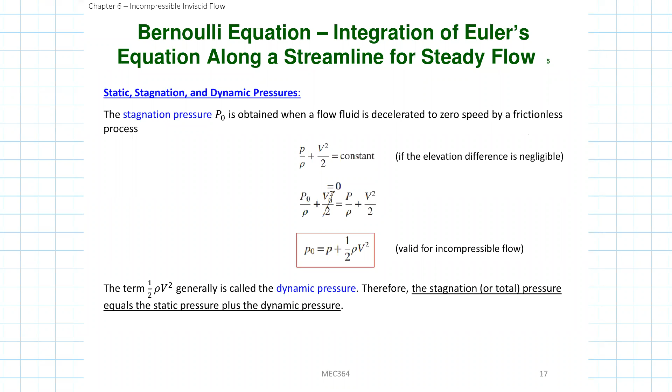In the last lecture, we focused on the introduction and application of the Bernoulli equation. I just want to emphasize once more that anytime you try to use the Bernoulli equation, those four restrictions should automatically come to your mind.

You can only use the Bernoulli equation for steady flow, no friction meaning inviscid flow, and incompressible flow - this is basically the title of this chapter. And the last important one is that you only do this along a streamline. Anytime you use the Bernoulli equation, you must make sure all four conditions are satisfied.

The Bernoulli equation is pretty simple but very powerful to use, and a lot of times you may automatically want to use it because it's very simple mathematically. But if those conditions are not satisfied, the result you get from the Bernoulli equation may be very wrong. This is the thing I want to remind you.

Also keep in mind that the Bernoulli equation is developed from the momentum equation - the Euler equation, which is the momentum equation. So it indeed tries to show you how the momentum is changing along the streamline. It shows you that the pressure work and the gravity work basically will change the kinetic energy - this pressure force and gravity force will change your momentum, this v squared over 2, for the fluid particle along the streamline.

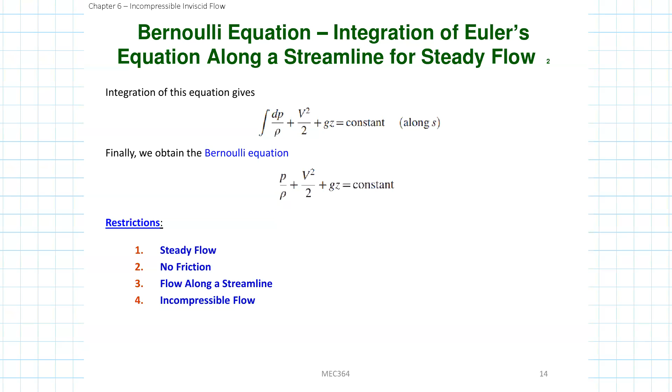So this is the way you understand the Bernoulli equation from the view of the momentum equation, from Newton's second law's way of looking at this equation. But we already know that this equation can also be explained in an energy view, which means we can also look at the Bernoulli equation as an energy equation.

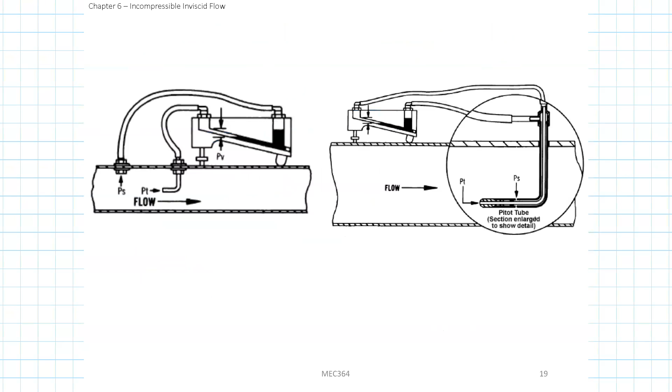So our task now is to try to derive the same form of this Bernoulli equation, but instead of from the Euler equation, we try to derive it directly from the energy equation. The energy equation is also called the first law of thermodynamics, and this is what we're going to do here.

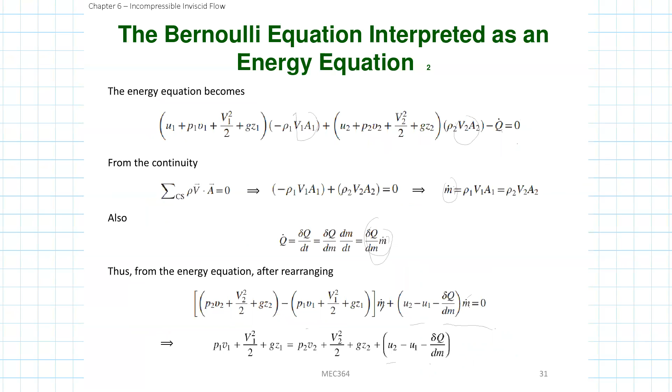So the same equation, we can derive from either the momentum equation or the energy equation, and they share similar restrictions: incompressible, inviscid, steady state, no other work, no other force. And remember that the way we derive this equation, we're using this stream tube - similar to the momentum equation, along the streamline, the last one.

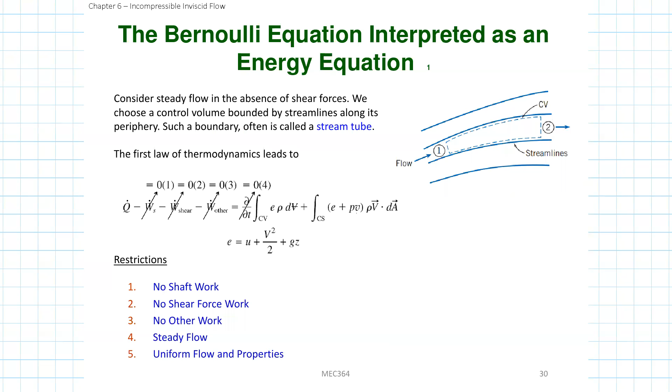This is showing that we can also derive the Bernoulli equation from the energy equation. This makes the Bernoulli equation even more powerful because it's already powerful, right? The math is very simple, no integration and differentiation usually needed. But now we also prove that this Bernoulli equation will be the only equation you need for this kind of inviscid problem if it's along the streamline. Why? Because it's incompressible and inviscid.

So the continuity equation plus we only need 3 equations, right? Continuity, momentum, and energy. And now momentum and energy equations are the same equation. So you greatly simplify your problem. Instead of solving 3 or 4 equations, depending on how many directions you have for the momentum equation, now you only need to solve 2. One is the continuity equation, another one is momentum, and this is the Bernoulli equation. That's it, because the Bernoulli equation itself represents both the momentum and energy equation. So you see how powerful it is.

But again, let me emphasize this one small point: this is only true when those restrictions are satisfied, especially inviscid, steady, and the very important one, along the streamline.

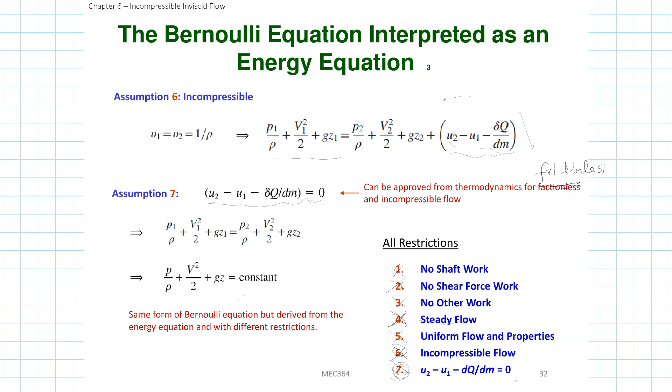So this is how we view this Bernoulli equation. How can we interpret this Bernoulli equation as an energy equation? So you may still have the issue with the last assumption, right? Why this is always true for inviscid and incompressible flow. In the textbook, we have an example problem to prove it.

So this proof is purely from thermodynamics. If you have already taken your thermodynamics class, or if you're taking it now, you should be familiar with this. So I won't emphasize this example problem too much. Basically, it's based on the Gibbs equation from thermodynamics.

It's showing that TdS equals dU plus p dV. This TdS, S is the entropy. U is internal energy, p is the pressure, and dV, this small v, is the specific volume. Because it's incompressible flow...

So because it's incompressible flow, we usually use v equals 1 over rho, so it's constant, so this term is gone. So you only have TdS equal to dU. This is for incompressible flow.

The second assumption is that it's inviscid flow. What does inviscid flow mean? It means that the process is reversible, because what the viscous force does is convert kinetic energy to thermal energy, and that's an irreversible process. Like a viscous force, like friction - when you have friction force, usually you can change kinetic energy to thermal energy, internal energy. Now because we assume inviscid flow, which means no viscous force...

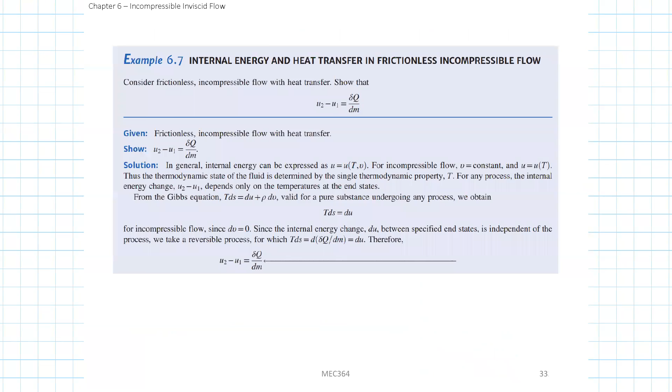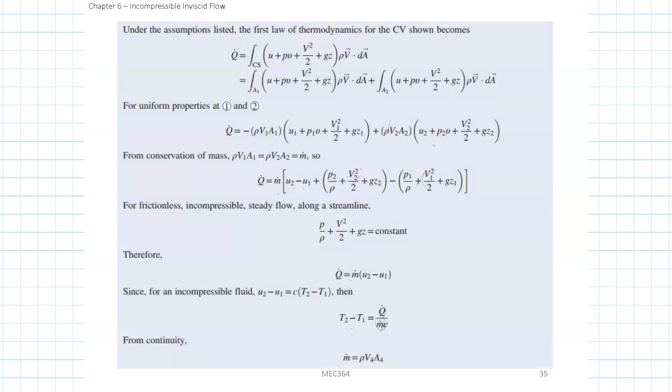So now we know the M dot. And then you apply this M dot back to this equation here. You can calculate the temperature jump. So you get the temperature jump.

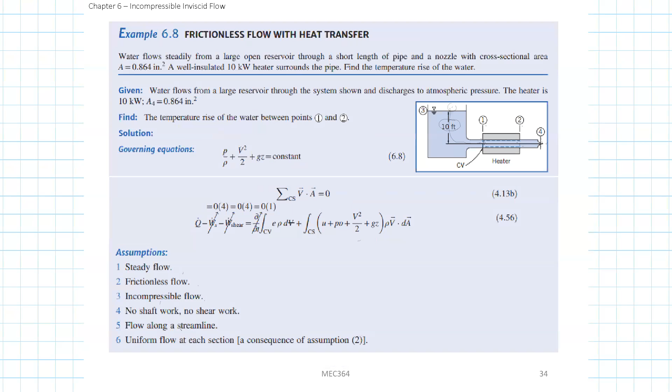Okay, this is telling you that with this heater, and also with this change of potential energy, what the temperature will be.

Okay, so this is an example to show you how to use the Bernoulli equation for energy problems. Okay. Any questions here so far, guys?

No question? Okay, so let's continue.

And so this Bernoulli equation, right? So let's go back to look at this Bernoulli equation again. Okay, because we have this Bernoulli equation, P over rho plus V squared over 2 plus GZ equal to constant, right? So this is the Bernoulli equation.

And let's rewrite this Bernoulli equation, just divided by this G on both sides. You know, divide this gravity on both sides. So we can write this one. So basically you get P over rho G plus V squared over 2G plus Z equal to a constant. Okay, let's denote this constant as H.

Okay, so what is the unit for this H? This constant H will be along the streamline, right? So basically you will have this constant value H for different streamlines, right? Along the same streamline, you have the same constant H for this quantity here. So what's the unit for this H?

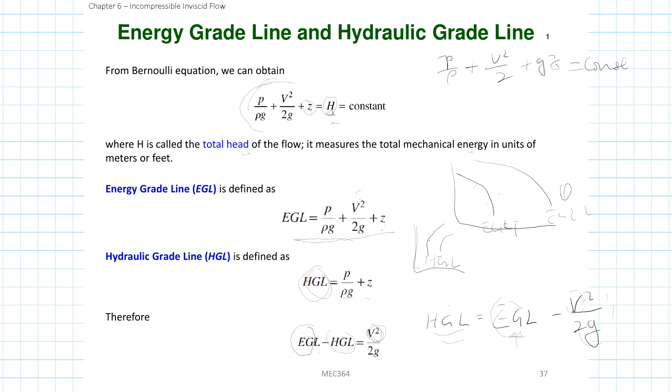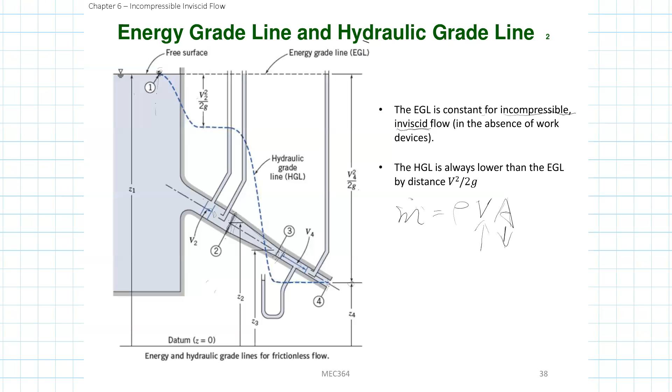Remember the Bernoulli equation we previously developed, either from the energy equation or from the Euler equation - we assumed it's a steady state flow. Actually, it's possible to also derive the same kind of Bernoulli equation along the streamline for incompressible inviscid flow.

But for an unsteady state flow - remember those four conditions we mentioned before: incompressible, inviscid, steady flow along a streamline. Now let's just make it three conditions, removing steady state flow.

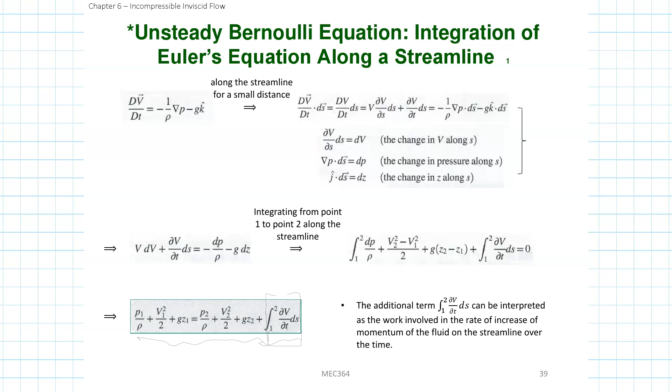All right, so now we've talked a lot about the inviscid and incompressible flow. For this chapter, we showed that for this inviscid incompressible flow along the streamline, the momentum and energy equations both collapse, both lead to the Bernoulli equation.

And there's one last special form of the fluid we want to introduce, called irrotational flow. Remember what we did before was for the condition like inviscid and incompressible.

Now let's add the third condition. Let's assume the flow is also irrotational. Okay, so the flow is still inviscid and incompressible.

Now let's add a new condition. Let's also assume that the flow is irrotational. What does irrotational flow mean? That means your angular velocity is 0, omega equal to 0, or vorticity zeta equal to 0, from the previous chapter. In other words, the curl of the velocity field is equal to 0. This is the meaning of irrotational flow.

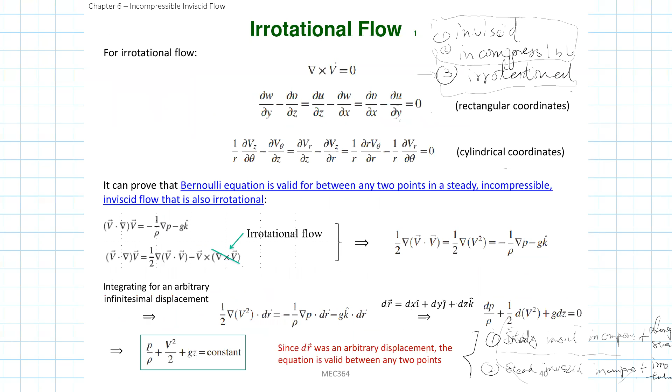And so this kind of flow - incompressible, inviscid, and irrotational - is also inviscid. Inviscid is always true here. If you have a flow that is inviscid, incompressible, and irrotational.

We usually call this kind of fluid perfect fluid or potential flow. Why are they perfect fluids? Because their governing equation is linear - it's just a Laplace equation. We can solve it very easily. That's why we call it perfect flow.

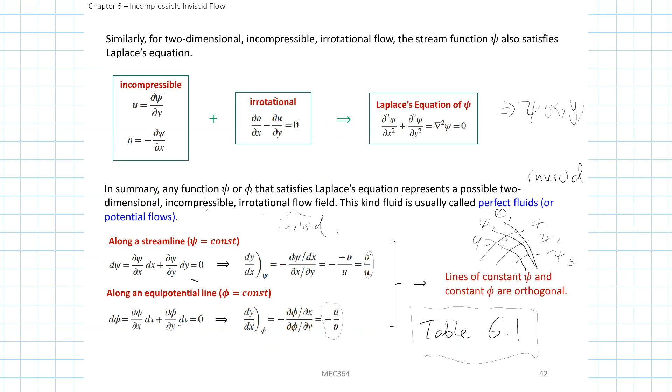Let's have some example problem. This example problem is similar to the previous one asking you to calculate the streamline, the stream function. Now let's try to calculate the potential function.

Let's assume that we know the streamline. Is this the streamline? Yeah, so this is psi, the streamline. Let's assume we know this streamline, and if we know the flow is also irrotational, what is the phi value that will determine the velocity potential?

So from the stream function psi, based on this definition of stream function psi, you can calculate the velocity field u and v. Because u will be partial psi partial y, v equal to minus partial psi partial x. After you calculate u and v here, you go back to the definition of the potential function phi, because u equals minus partial phi partial x, v equals minus partial phi partial y.

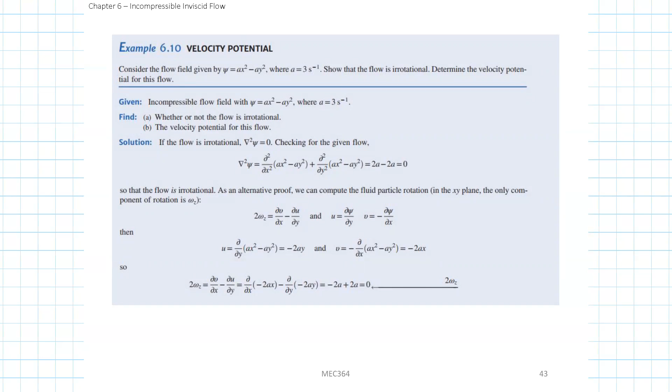Then you do integration one by one, you can calculate phi. First, from here you can calculate what the phi value will be. You integrate on x, and then you integrate on y, and then you know your potential phi value will be this way. So this is a very simple example problem just showing you that if you know the psi value, the stream function, you can calculate the velocity from it, and then you can again calculate the phi potential velocity potential from the u, v value. Keep this in mind, how to do it.

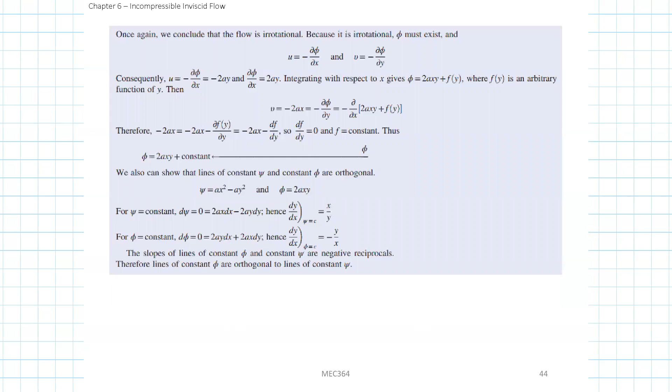So here we just introduce the very fundamental things for irrotational flow. Actually the topic for irrotational flow is a big one. If you have a chance to take the graduate class in Stony Brook, we have an individual graduate course, I forgot what it is, it's MEC 509 or 506, I forgot. The whole class talks about the solution of this irrotational flow, and that class is called perfect flows, perfect fluids.

Why? Because we already know that if we want to get the u, v field, the velocity field, we only need to solve this Laplace equation, either for phi or for psi. So we can very easily get the analytical solution for different kinds of flow problems, because this equation is very simple to solve if we know the boundary condition for psi and phi.

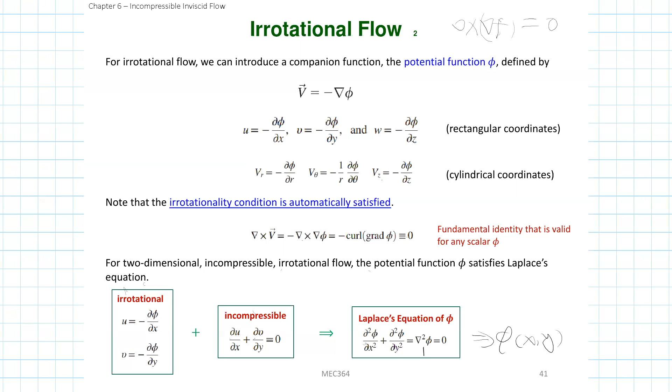Another thing we want to mention is that both of the equations, the psi equation and the phi equation, are Laplace equations, which are linear equations, linear differential equations. Actually, you can use the method of superposition. What superposition means is that if your problem is linear, you can decompose a very complicated problem into several simple problems and just add them together. What does it mean? I think I gave this example before, right?

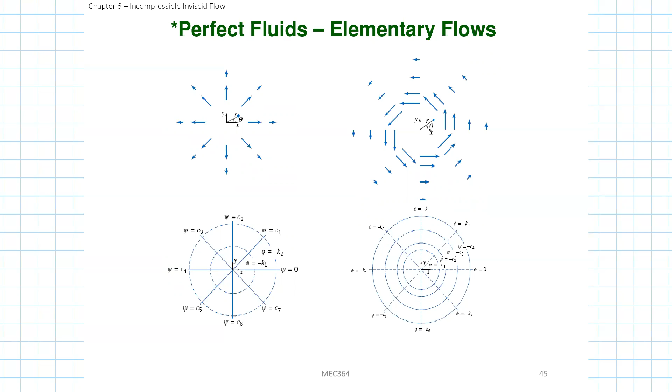In the textbook you have a table showing different elementary flows and their results. If you find a flow problem that can be combined with a linear combination of these elementary flows, you just add them together to get your solution. This is the meaning of superposition, and remember it's only valid for linear problems.

The reason you can do it is because the Laplace equation for psi and the Laplace equation for phi are linear. If it's the original Euler equation or Navier-Stokes equation, you won't be able to do that because you have this v dot grad v term.

That is, you know, u partial u partial x term, you have those kinds of things. This is the convection term, not the mu partial square u partial x term. This is a nonlinear term because you have u times another u, v times another v. You won't be able to use the same superposition method for Euler's equation or Navier-Stokes equation. No.

All right, so here I've finished this chapter 6. I think we have 3 weeks of class left, so after the midterm on Friday, we'll continue with chapter 7, which will introduce the method of similarity, non-dimensionalization and similitude, and after that we have chapter 8 and chapter 9. Any questions so far?

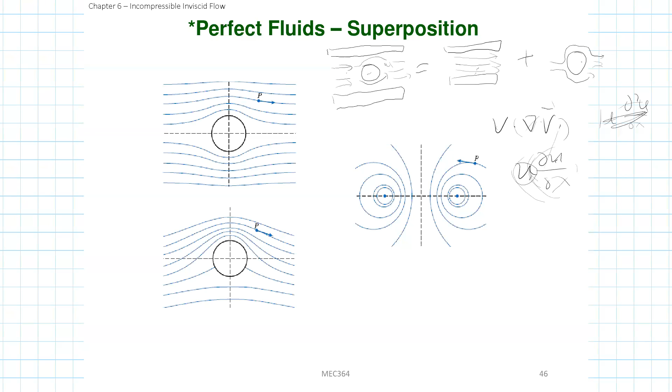No question? Professor, what chapters are the exam going to cover? Chapter 4 and 5. So this is chapter 6, right? So chapter 4 and 5.